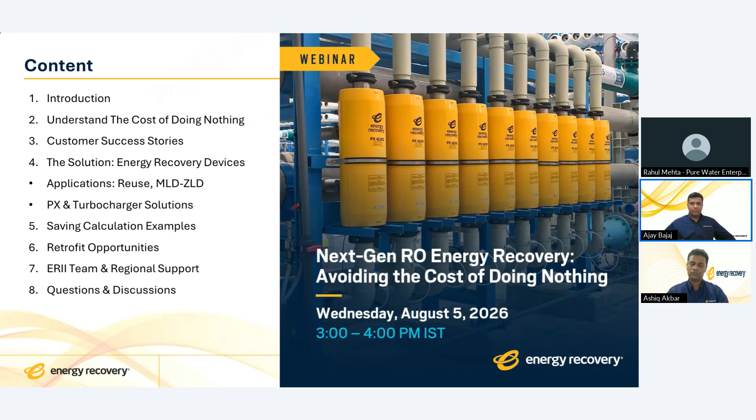Energy recovery devices have come a long way, right from seawater desalination to reuse to MLD or ZLD RO applications. And this webinar is very important and paves the way for what energy efficiency means to the plant. Next slide, please. Now, many of you know Energy Recovery. Energy Recovery is a market leader in this space, and we continue to develop products which are relevant to evolving market needs and even the challenges that we are facing today.

So I am Ajay Bajaj. I am responsible for the India and Australia region, and I will take you through the rest of the webinar. And as we go through, I think it is important to know the company Energy Recovery, what products and solutions we are developing and how these products and solutions can help you. Next.

Now, let me briefly introduce who Energy Recovery is. Energy Recovery is a global technology company that manufactures high-performance energy recovery solutions for the reverse osmosis process. For more than 30 years, our core expertise has been pressure exchanger technology, which has helped customers around the globe to reduce energy consumption in seawater desalination plants. Now, this is where we have established ourselves. Our objective is very simple and straightforward: help the customers to produce more water while using less energy.

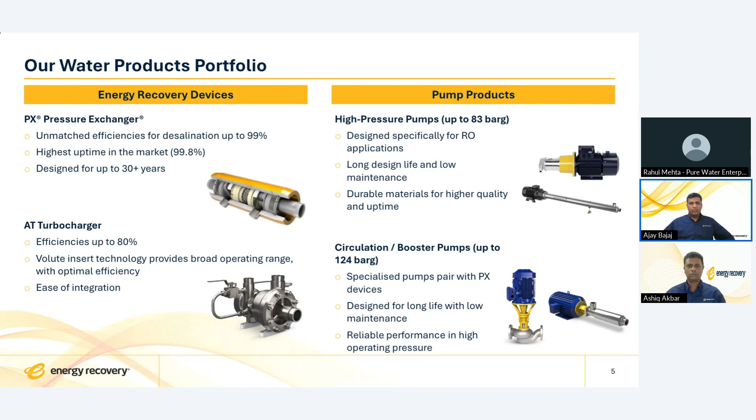Today's session is more about energy recovery devices. I would like to shift the discussion from who we are to why energy recovery matters. The theme of the webinar is avoiding the cost of doing nothing. Over the next 30 minutes, we will look at where energy is lost in a reverse osmosis system, why it matters, and how this energy can be recovered to reduce the operating cost of the RO over the life cycle of the plant.

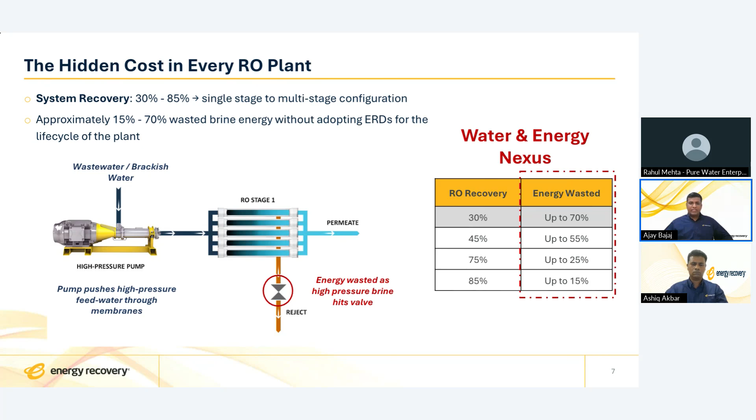Now let us understand the capex opex comparison of an RO plant through an example. Next slide. Yes. This is a very simple capex opex example. And this is important because whenever a new RO system or facility is planned, the first question is usually around the capital cost. What will be the project cost? This question is very, very important, but I think that is just the beginning of the story.

When you commission the plant, the capex is paid once, but the operating cost stays with you for the next 20 to 25 years while you operate the plant. In this example, capital cost is compared with the operating cost for a period of 10 years. Why a 10-year evaluation period? Because in our region, this is a practical evaluation period considered in many projects.

As you can see, capex contributes less than 25% of the cost. Everything else is opex. If you further break down this opex, electricity typically contributes 40 to 60% of the operating cost. That makes electricity the single largest controllable cost in the reverse osmosis plant.

So the message is very, very simple. Capex is something you pay once, but opex is something you pay every day as long as you operate the plant. Every decision we make today has a life cycle cost. And choosing not to recover this energy also has a cost. This is the cost of doing nothing, which is the theme of our webinar today.

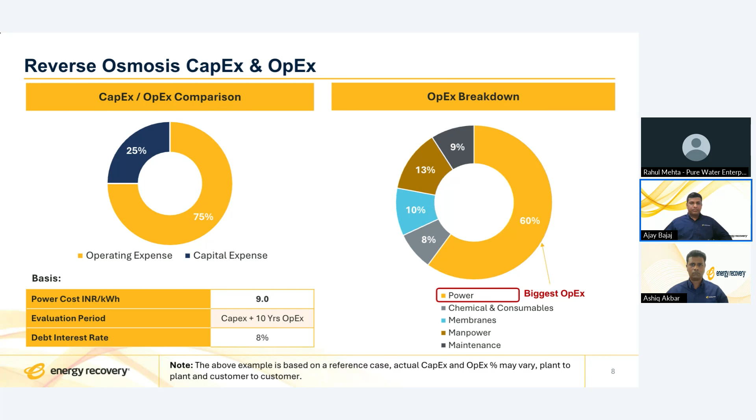Next slide. Now let us look at some customer success stories who have already installed these energy recovery solutions, and how these energy recovery devices are helping them save money in real operating conditions for the life cycle of the plant. We'll first start with the Indian example. Next slide. Our first example is Ranitec CETP in Ranipet, near Vellore, Tamil Nadu. This plant treats leather industry effluent, where the water quality is very complex.

Now, what makes this case study interesting is that this customer installed a turbocharger solution in 2011 and 2012, long before many people would have even thought about installing energy recovery devices in wastewater applications. Later, when zero liquid discharge regulations became stringent, a brine concentration plant was installed along with a pressure exchanger. Today, both these technologies are operating at this plant successfully, for the last 10 years the pressure exchanger and over 15 years the turbocharger. The combination of both these technologies is helping the customer save 10 lakh units of electricity every year.

For those of you who are joining from overseas, this is approximately 1 million units of electricity per year. At the prevailing cost of INR 9 rupees per kilowatt, this is approximately 90 lakh rupees per year worth of energy saved, which is close to 94,000 US dollars annual saving. Now think of it, for a 20 year life cycle, if the power cost remains the same, the value would be close to 18 crore or maybe 1.89 million.

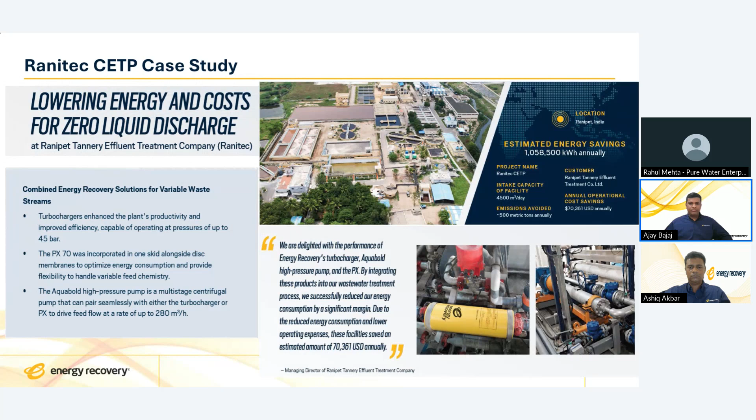Now, let me share another example. Why is this example interesting? This example is coming from a municipal reuse application. Many of you know that municipal reuse applications are typically low pressure. The customer is located in Belgium. The plant was recently commissioned in 2025, and it shows that energy recovery can be quite valuable even in this low pressure application. This is a very small capacity plant, 1.3 MLD or 1300 cubic meters per day, operating at around 70 to 75% recovery.

By installing the low pressure PX in this plant, the customer has reduced the operating energy consumption by 23%. Even though the operating pressure is very low, from 6.7 bar to 13.9 bar, the payback is still less than 3 years. Again, the key here is to look at the investment through the life cycle of the plant, and this is what is important.

And as we see, municipal reuse is also growing in India and across the globe. We are seeing so many reuse opportunities where treated sewage is being reused for non-potable applications or even supplied to industry. So these types of examples, at the scale at which we are seeing reuse, are going to be very, very important and going to set the benchmark. Next slide.

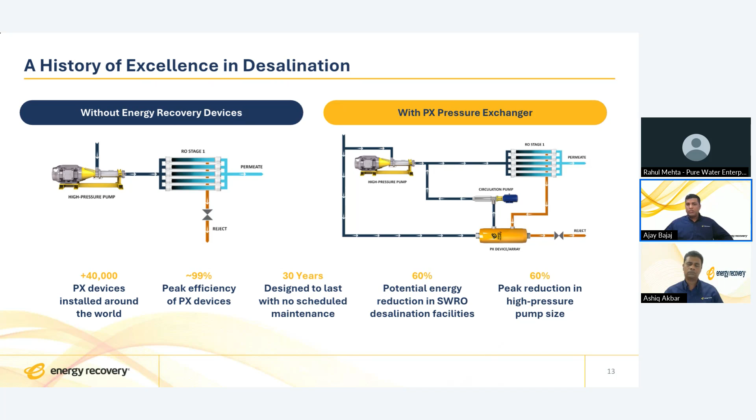So for bigger capacities, naturally you can install multiple modules in parallel. And if you look at the ultra high pressure RO applications, where eventually the water is concentrated, the flows are very, very low. So the ultra high pressure PX can be used from 2.3 cubic meters an hour. That's the smallest flow, and the maximum flow is 56.8 cubic meters an hour. So in short, whether you are designing a municipal reuse plant at 8 bar or an ultra high pressure RO designed for 100 bar or 110 bar, there is now a pressure exchanger solution available for this range.

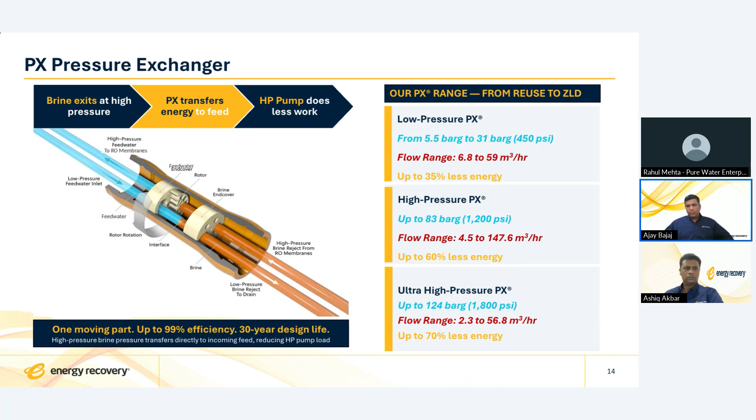So in this case, your reject pressure is typically higher than the high pressure which is going to the membrane array. So in this case, you do not need an extra circulation pump to make up for the loss because the extra pressure is available. Now, whether a circulation pump is needed or not depends on the feed water salinity, the recoveries you are working at, and typically the hydraulic design that you are following. So based on that, my message is that a pressure exchanger can be integrated into both types of configuration.

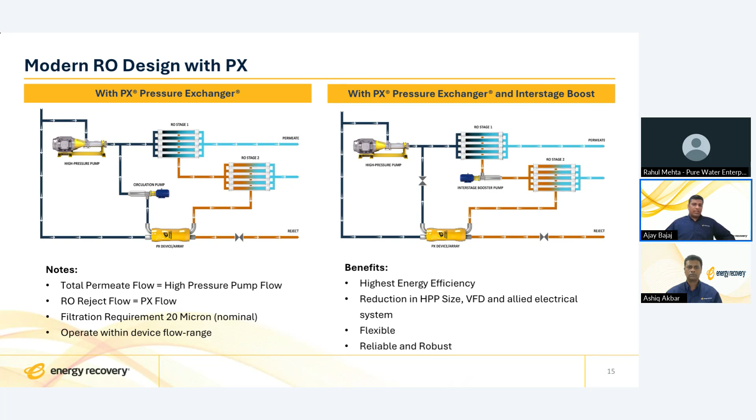So the takeaway of this slide is very, very simple. There are different ways to integrate the pressure exchanger into an RO design. So the point is, after integration of the pressure exchanger, the system not only recovers water, but it also recovers the energy which was otherwise getting wasted. And that is the modern RO design we are talking about. Modern RO designs are energy efficient, low OPEX, and lower carbon footprint. That is the need of the hour. Next.

Yes, another type of energy recovery device, the turbocharger. Turbochargers have been in the industry for a longer time. And nowadays, the use of turbochargers has become very niche. And this niche use is typically maintaining the high interstage booster pressure. So we look at how the turbocharger replaces the interstage booster pump, and what is that sweet spot where turbochargers can be used. I'll just speak of a general rule of thumb where we have experienced that for these cases, a turbocharger becomes a better option. So when to select a turbocharger, I will speak in the next slide.

Now, the high pressure reject basically enters the turbine, causing it to rotate. And because of this rotation, the energy is transferred through the shaft to the pump impeller, which boosts the interstage feed before it enters the second stage. Now, in short, the turbocharger converts hydraulic energy into mechanical energy, and then mechanical energy back into hydraulic energy, which is eventually the boost pressure in simple words.

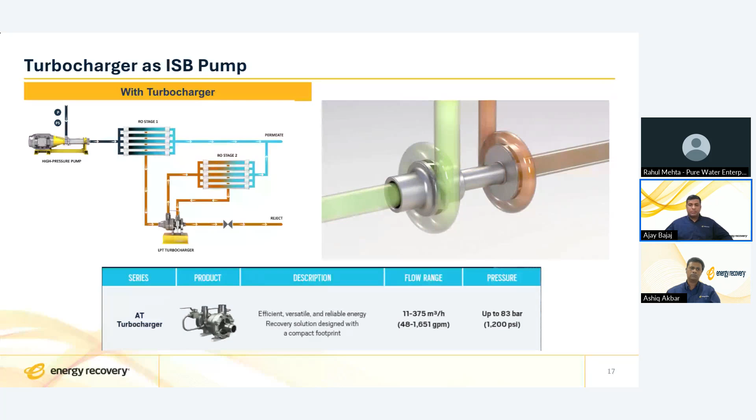Now, so far, we have covered the technology. We have seen how it works. We have seen where it fits in the multi-stage RO. Now, we have to come to the most important question. What does it mean in terms of actual energy saving? Okay. In the next few slides, we'll talk about a few examples of how these energy recovery devices are saving the operating cost across different RO applications.

Now, some of these examples or calculations which we have shown today are real executed projects, and there are a few examples which are representative design calculations based on real operating conditions, so that we can explain how these savings are coming up. So next slide, please.

Okay, so let us begin with this tertiary treatment reuse example. Now, why are we beginning with this example? Because we are seeing a lot of tertiary treatment plants under discussion coming up for bidding, and reuse is becoming very, very common. Be it a data center, be it municipal reuse, be it supplying water to power plants. Reuse is going towards a place where we are now accepting UF and RO application. And typically these applications are big in flow and low in pressure.

So this example is a 10 MLD TTRO plant where feed TDS is 1200 ppm, designed for 75% recovery. Now in this case, if you go without an energy recovery solution, the high pressure pump consumes only 164 kilowatt of electricity. The high pressure pump is designed for full flow. Operating pressure is 12 bar. Feed pump remains the same. So the total energy consumption is 221 kilowatt.

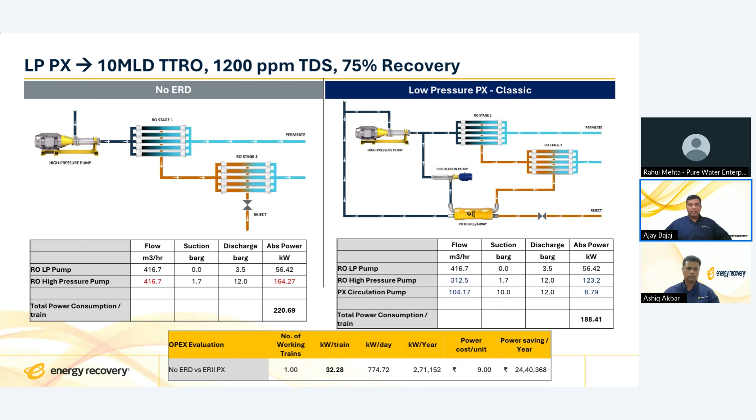Again, medium-sized plant, 4 MLD, 6100 ppm TDS, designed for 65% recovery. Now, in this case, again, you look at the high-pressure pump, kilowatt is close to 120. If you look at the pressure exchanger integration case, the kilowatt rating goes down to 57, 58 kilowatt. Net saving of 31 kilowatt every hour.

So if you multiply it by 24 hours of operation for 2 skids and 9 rupees power cost, close to 47 lakh rupees saving in the power every year, which is close to 45,000 US dollars. And even for such a medium capacity plant, it can really deliver attractive financial returns if you look at the life cycle cost of the plant. So that is another example for you. Next one.

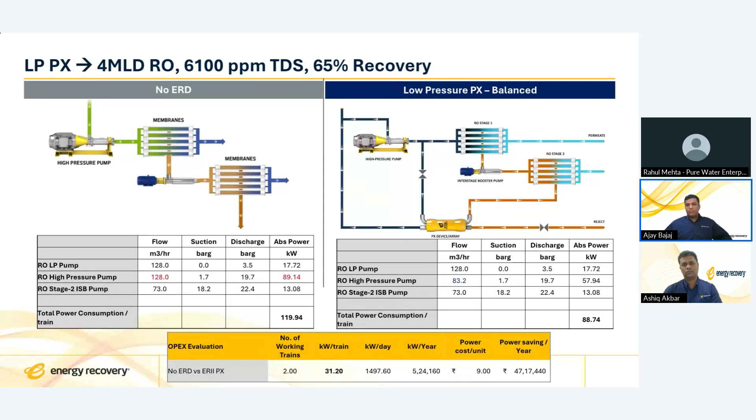Okay, turbocharger. We have seen turbocharger, right? You have heard that turbochargers are best suited for high recovery applications and cases where interstage boost is more. And maybe for customers who are very tight on capex, this could be one of the solutions which can be implemented. Turbocharger straight away replaces your interstage booster pump in most of the cases.

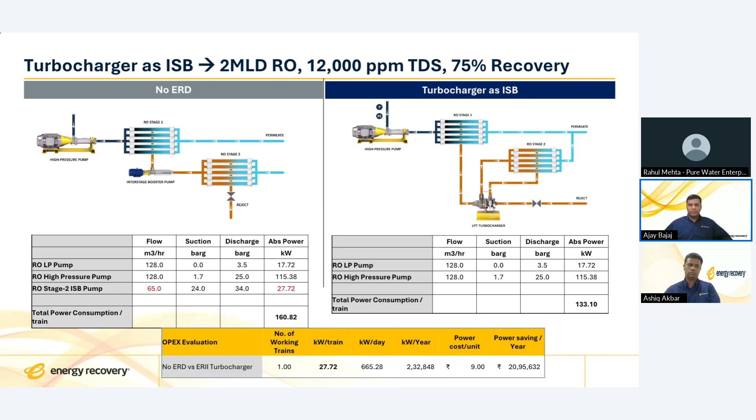And you are saving typically close to 21 lakh rupees or $18,000. And most of these turbocharger cases are capex neutral, because anyway you would have bought a pump, a VFD, and electrical system. Instead, turbocharger works out to be a very good capex neutral solution here. Next.

Yes, this is very important, and this is what we are seeing, and probably many of you may also be seeing this in the market, that zero liquid discharge, there is a regulation in India, and it is already implemented at certain places, and in those places the RO recoveries were limited to a number, maybe 90%. And there are some regions where the recoveries are higher. But why were the customers not able to concentrate the water beyond this level? Because the ultra high pressure membranes were not available.

And in the last few years, 3, 4, 5 years, the whole ecosystem around ultra high pressure RO has shaped up very nicely. Now you have ultra high pressure RO membranes, you have pumps, you have membrane systems, the whole ecosystem is developed. Now, many of you already know that evaporation is a costly process, and it consumes a lot of electricity as well. So recovering this brine before going to the evaporator by ultra high pressure RO is one of the solutions many customers are implementing today.

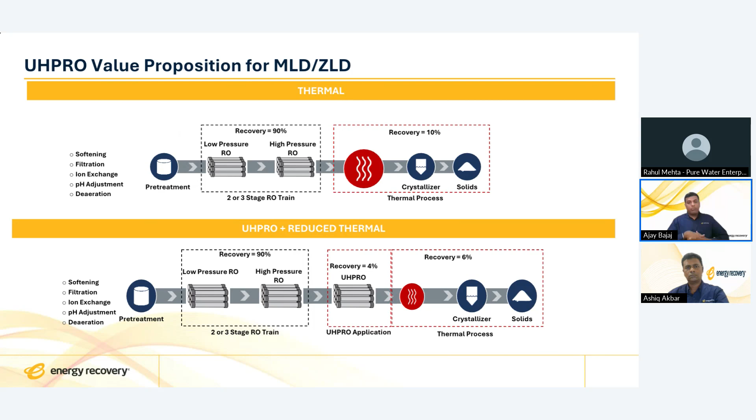And if you implement the solution, the net liquid going to the evaporator is coming down, and ultra high pressure RO is something that you can operate at a very, very low operating cost. Further, if you integrate energy recovery devices, it again reduces your operating cost. Let me take an example: in seawater desalination, the operating pressures are 55 to 70 bar. And in ultra high pressure RO, these operating pressures could be 90 bar, 100 bar, 110 bar. So recovering that energy becomes very, very important.

And now if you look at this example on the screen, for such a small 400 meter cube per day system, 90,000 is the feed water salinity, designed for 35% recovery. Without an energy recovery device, you would go for a full capacity pump. At 110 bar, it would consume 82 kilowatt of electricity. Whereas if you go with the pressure exchanger, the high pressure pump capacity goes down by 65%. And now for the same pump, you are consuming 29 kilowatt. That is a significant reduction in the power.

So roughly by adding a pressure exchanger, you can save 52 kilowatt hour, multiplied by 20 hours of operation. That is 1000 kilowatt every day for such a small 400 meter cube per day system, which translates to 32 lakh rupees or 39,000 US dollars for people who are joining overseas. So this is really implemented on the ground in India, a UHPRO of slightly bigger capacity, and these examples are real and becoming very, very important to the end customers. Next slide.

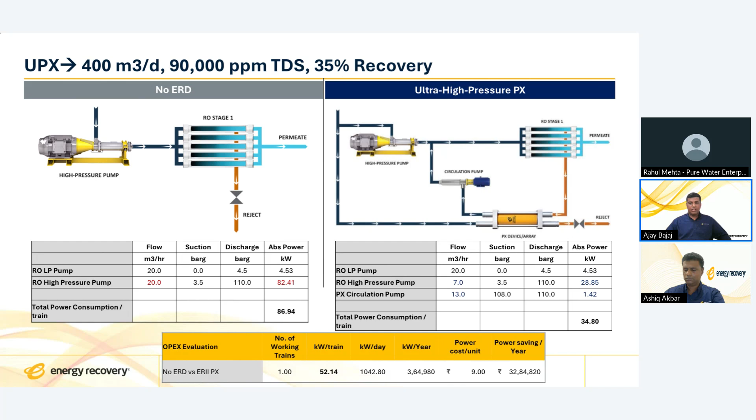Okay, now I would like you to think about a plant. If you are an end user operating the plant, or if you are an OEM or EPC who is again operating the plant, if it is part of your contract, you can ask yourself these 5 questions. Is your plant already recovering water? Your answer may be yes, but is it also recovering the energy?

Over the last few years, electricity prices have become the single largest operating cost, and we know why. Because in many RO plants, energy is one of the highest OPEX items. And further, these rising costs are becoming a challenge to operations. Another question: many organizations have set targets to reduce energy emissions and the carbon footprint. So if you are an end user operating the plant, are sustainability goals becoming part of your business?

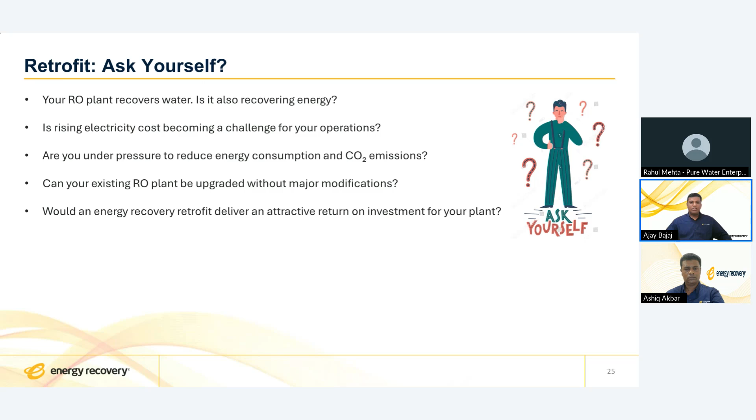Now the good news is that you can retrofit the plant. Yes, but you will be curious to know how much cost you will save. Go on to the next one.

Now, before I talk about this slide, I want to run the last poll of today's webinar, and I'm curious to know what you think. The poll question is: would you like to know how much energy cost you could save in your existing RO setup? There are 3 options. A, yes, please send the details. B, maybe share some info. And C, not right now. So we'll wait 15 to 20 seconds for you to log in your answers, and let us see what the audience has to say.

Yeah, poll results are coming up. 85 people have voted so far. We'll wait for 5 more seconds, but we know there is a big option which is being selected. Okay, can we publish the poll results?

It is great to see many of you are interested in understanding the saving potential of your RO plants. And the good news is that you don't have to estimate it on your own. If you can send us some information about your existing plant, the design capacity, the operating parameters, the flow rate, the pressures, the TDS, the recovery range, whether you are increasing and decreasing the recovery based on production and water quality, we'll help you by telling you the amount of energy which can be saved in your plant.

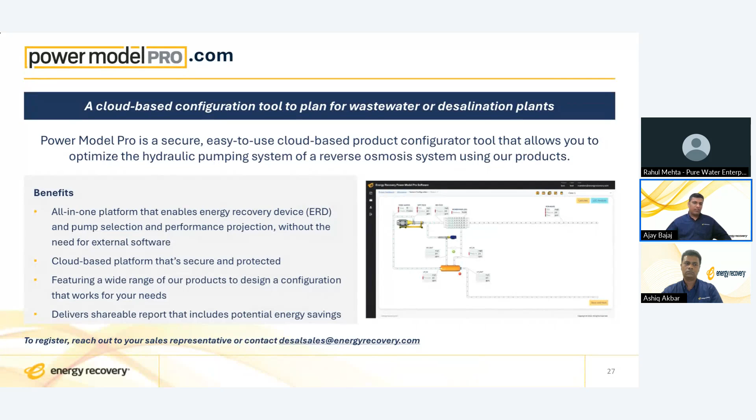So the important point here is that for OEMs, EPCs, and consultants who are working, we have made sure that they are also empowered to select these energy recovery devices. And this remains common knowledge: look how easy it is to select these solutions, because your RO system is already designed. And now you just have to make sure that you have the energy recovery solution designed so you are recovering the best possible energy from that system. Next.

And this is something which is very, very important. Go on to the next one, please. See, behind every project, there is a strong team which helps you execute the project. And at Energy Recovery, we support our customers through the life cycle of the project, from specification, to design, to commissioning, and even aftermarket support. So whether you are working on a desalination project or an industrial reuse project or MLD, ZLD or retrofit, this is the regional team that you have.